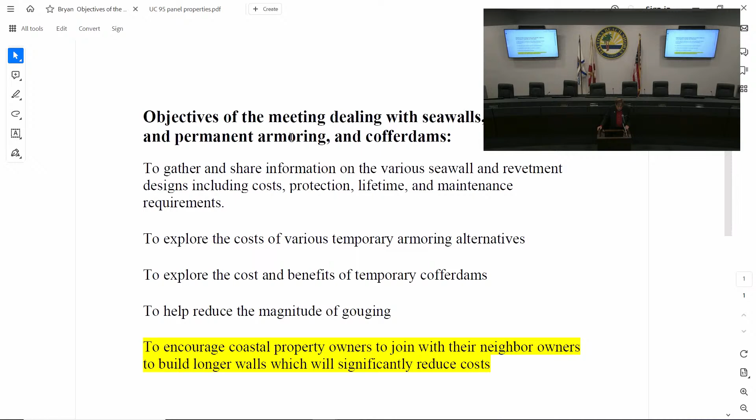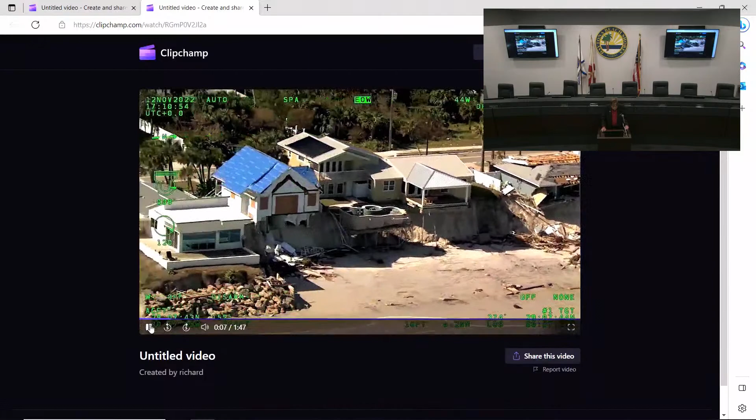So the next slide - it's not actually a slide, it's a video. This is kind of to remind you of the devastation, but there are some significant points along here that I want to point out. This is the destruction down in Wilbur. Let me see if I can get this. As you know, did you want a maximum? Yeah, okay, thank you. There you go. I'm going to back this up a little bit.

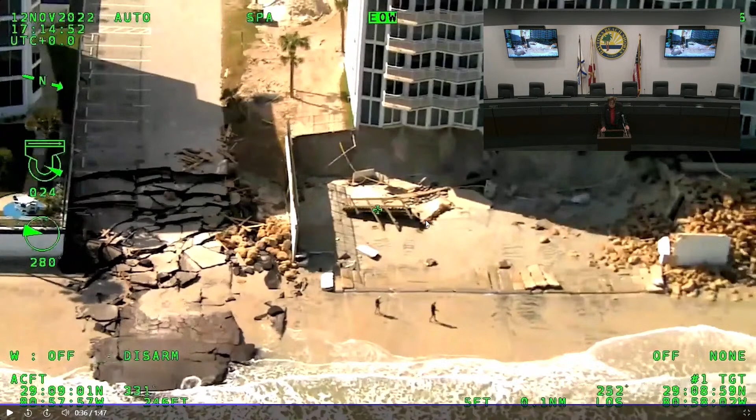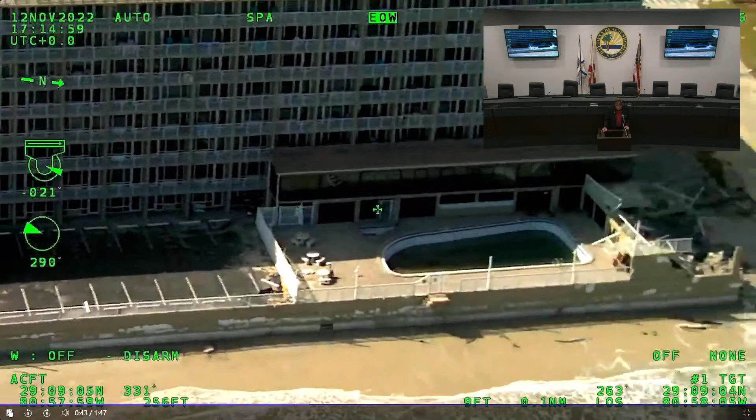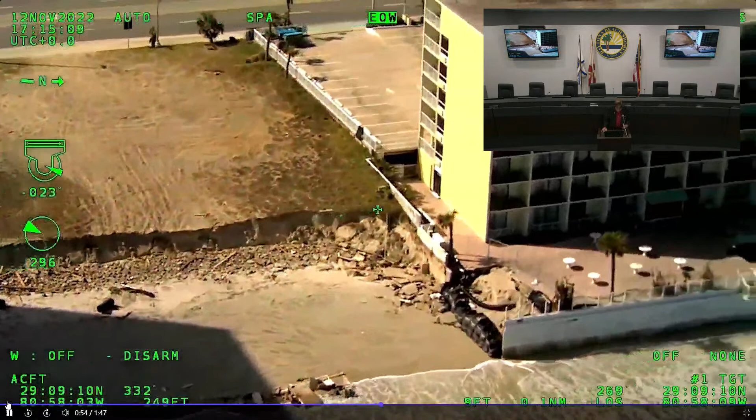This is next to Towers 10, a vacant lot that got a lot of erosion. I'm going to stop here at Peck Park.

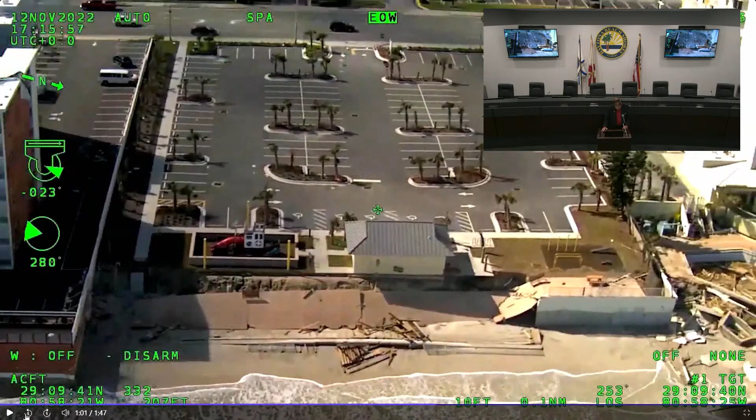One of the things this shows is this seawall over in the north corner - about 51 or 52 feet of fairly new seawall, installed in the last 2 years. The design is reinforced concrete. It actually suffered some erosion on the north side and south side of the soil behind it, but it stood, whereas the bottom of the south, maybe 150 feet or so, was demolished. I guess what that says is not that a concrete seawall is the best, but this particular design protected against Nicole, even with partial erosion on the north and south ends. That wall happens to be leaning a little bit to the west now, but it's one example of a seawall that basically held.

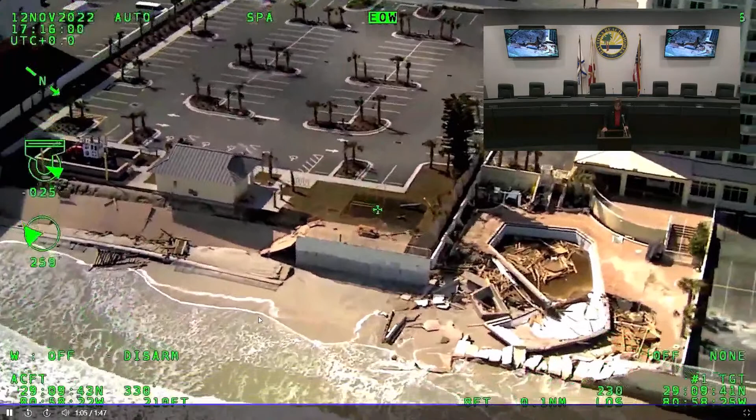Hey Richard, just to clarify, the north portion was a separate, newer one. Yeah, the other part was an older one. Yeah, right, it was built in the last 2 years, and the other was older. I think it was designed on top of an old seawall, which is basically a no-no.

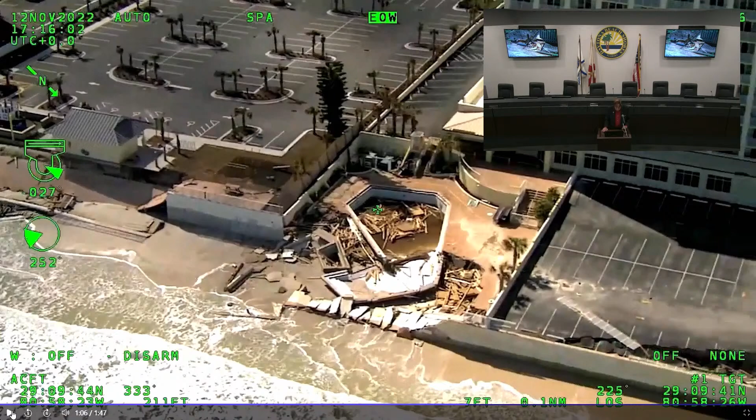There are properties adjacent to Peck Park - see this one, and the one just to the north of that property. I think this is St. Croix on the north. Those three properties south of St. Croix could benefit if they got together and built a common seawall, if we knew who the owner of the lot was. St. Croix probably doesn't need to be part of the common seawall, I think. But anyway, that's just an example of a row of properties that could benefit.

I should mention that erosion has gone back further since Nicole, quite a bit. That's another reason why there needs to be temporary armament to protect these properties, because probably none of those three will actually have a permanent seawall by the end of the hurricane season. That's just my guess.

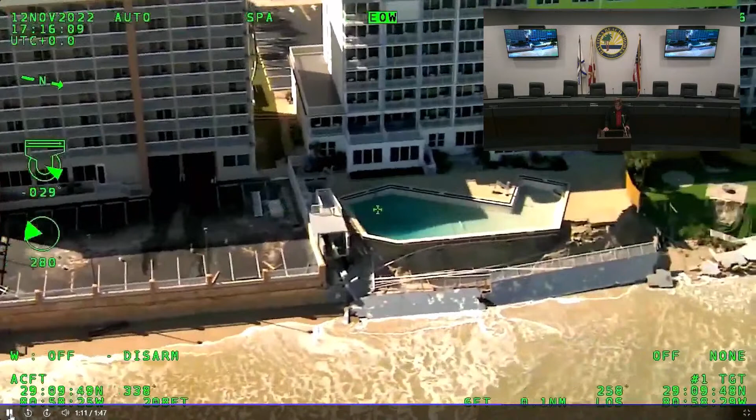These are approximately 30 homes south of Frank Rendon Park and north of St. Kitts. You can see the significant erosion. I think on average these properties lost about 60 feet total - approximately 30 feet from Ian, and another 30 feet from Nicole.

You can also see that the erosion goes back to the property, that's called an escarpment - that's erosion that goes all the way back to where you see a wall of sand. You can see from this picture that the escarpments are not in a row, they're staggered. I'll tell you a little bit why that's an issue.

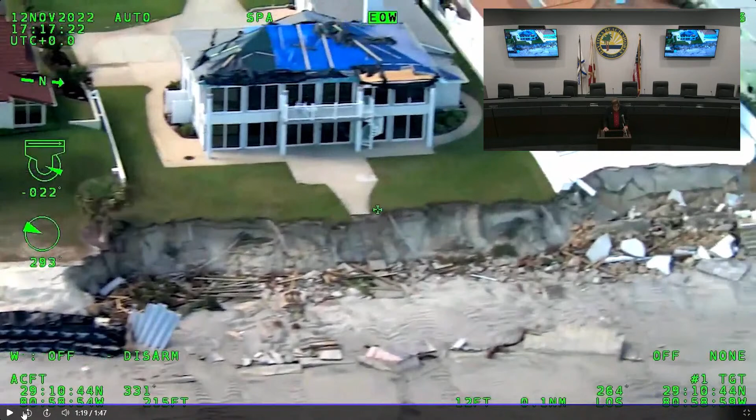If we go forward just a little bit here - that property, which happens to be 2727 South Atlantic, put these trap bags out after Ian and before Nicole. I think the configuration is one trap bag on top of two, I'm not 100% sure, but I think it is. So whatever the configuration is, it protected against significant erosion through Nicole.

Right now it's the only property that I'm aware of. If any of you know any other properties that have either a two trap bag configuration like the county's putting out, or a one-over-two, I'd be interested in knowing that, because that may be important empirical data that says what temporary armament might get people through the next hurricane season.

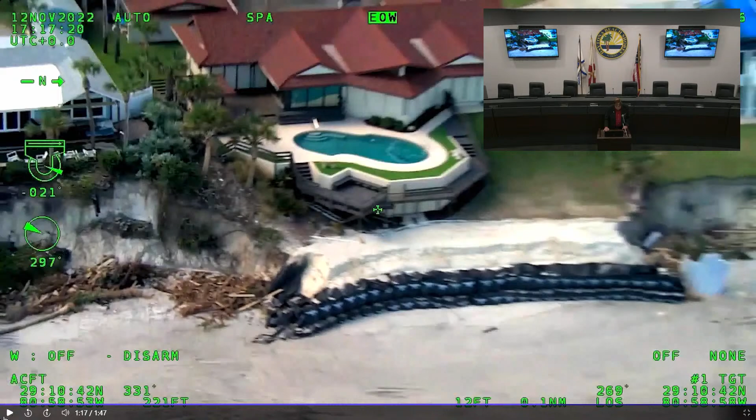This is just some more of the single-family homes showing you how the escarpments are uneven and the kind of damage. The one at the very end next to Frank Rendon got a lot of damage.

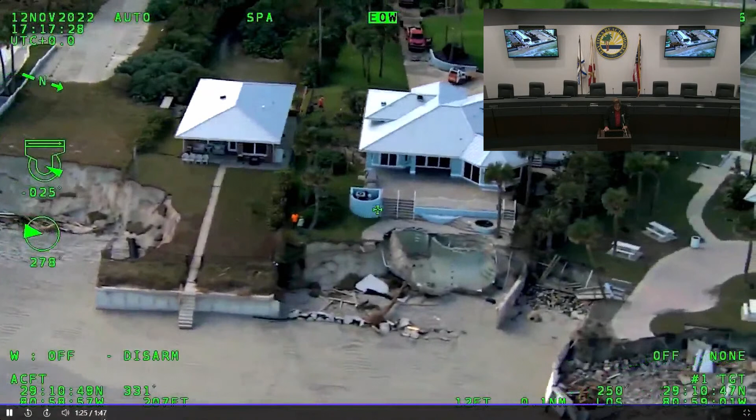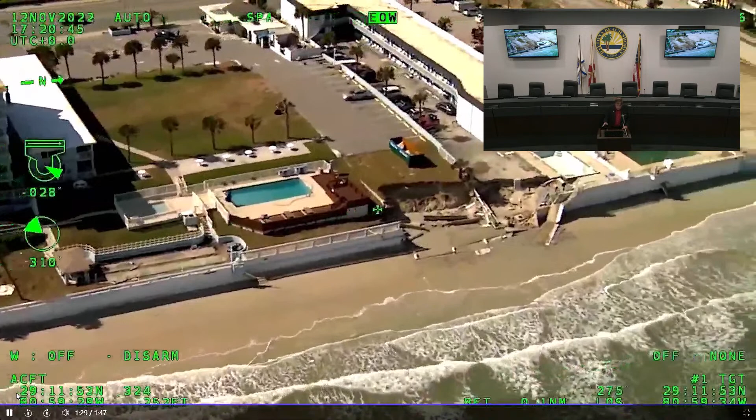This row of properties, what you're looking at in the middle is what used to be Treasure Island, plus the property to the south of it. That's about 700 feet of property.

So the people streaming can't hear you. Oh. Can you hear me now? Okay, this is...

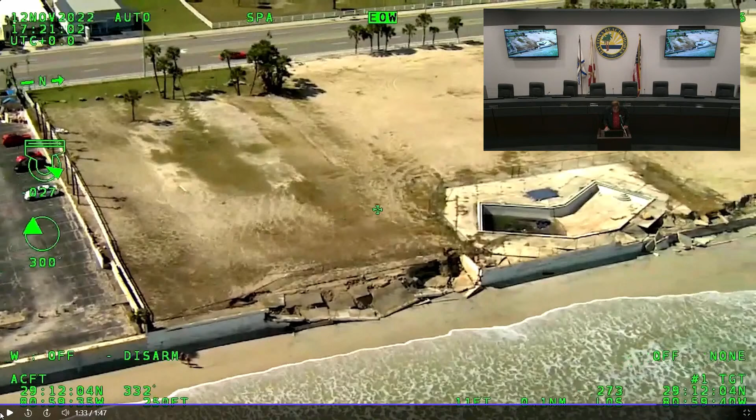To the south of that there's property, and to the north of that there's property. We can go a little further north - this is one prime example. If these neighbors got together and cooperated, there's probably 2,500 or 3,000 feet there. If they built a common seawall, they could save a considerable amount of money, and probably aesthetically it would be more pleasing to people rather than having a hodgepodge of designs. That's up to the property owners to judge - I don't have much of an opinion one way or another on the aesthetics. They can actually get a better design, and put more time and effort into the engineering by splitting the engineering costs and so on. So that's an example of a fairly long stretch in the shores that could benefit.

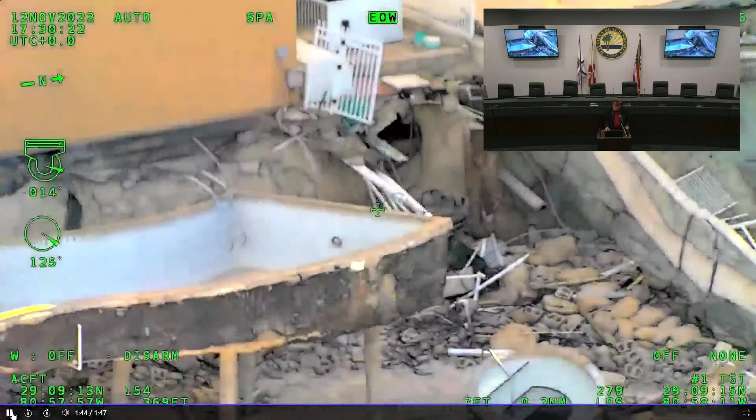That's some more. That's the end of the video.

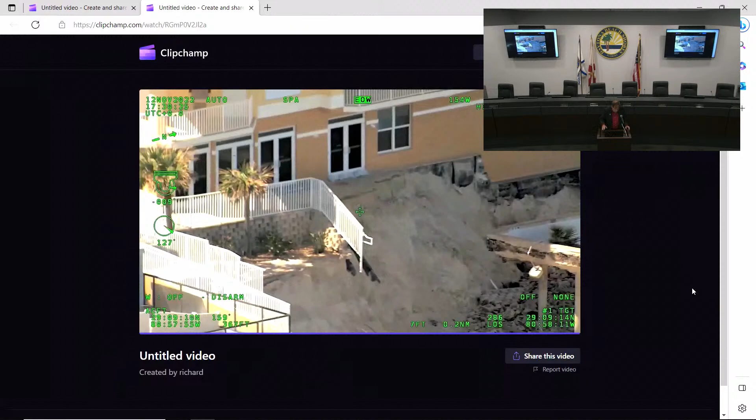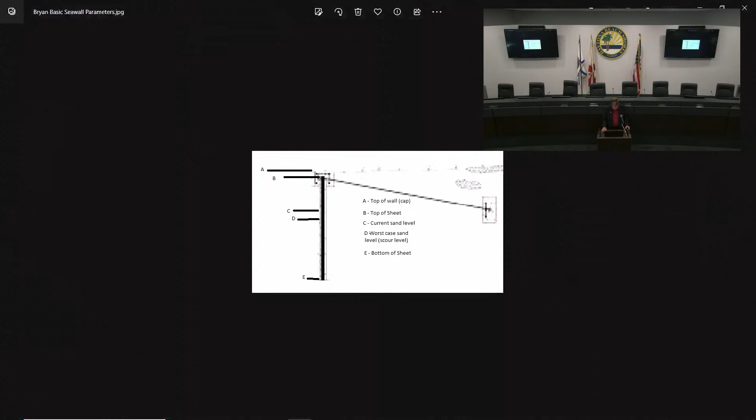Okay, I'm going to move on into what you might call Seawall 101. The engineers can take a short nap if you want, this is pretty basic.

This is like a cross-section of a seawall. There are 5 kind of important numbers. Obviously the top of the seawall, which is here, is the top of the cap, A, that elevation, and there's a coordinate system called NAVD that all these numbers would be expressed in.

Some people think of above ground, but the sand is not static, it moves up and down in elevation, so it's not a very good reference point. NAVD is a fixed point, it doesn't matter where the sand is, the zero NAVD is the same. Physically, it's approximately the mean high water mark, just to give you some feel for what it is.

Inside that cap, there's typically the top of a sheet. That elevation is B there. Numbers between A and B are typically like a foot, maybe 2 feet.

C is just where the sand happens to be whenever the analysis is done. It's kind of unimportant, because what drives the design is D, which is basically the lowest level of the sand next to the seawall that you can expect over time. It's like a worst case level. Unfortunately, it's not something you can just plug into a formula and have every engineer get the same answer.

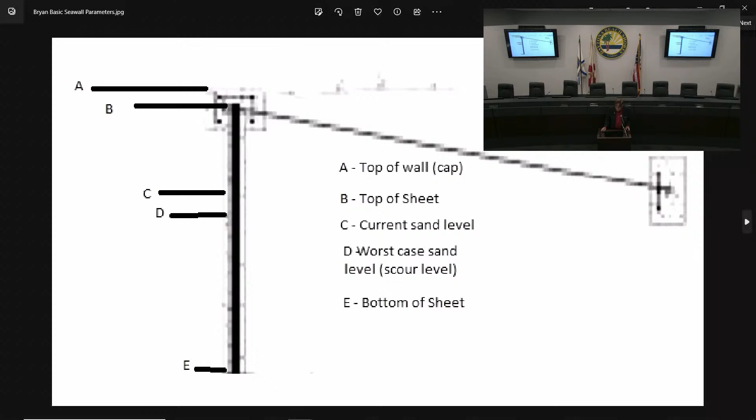And E is just the bottom of the sheet in NAVD coordinates. We sent a questionnaire to all the presenters and potential presenters asking for a bunch of information, including those numbers, and I think at least some of the presenters will say what those numbers are for their design. I'll be covering one of the properties and I'll spell out those numbers for that property, which happens to be Twin Towers.

This is a revetment, and I think I'm going to save what I have to say about revetments until after the seawall presentations.

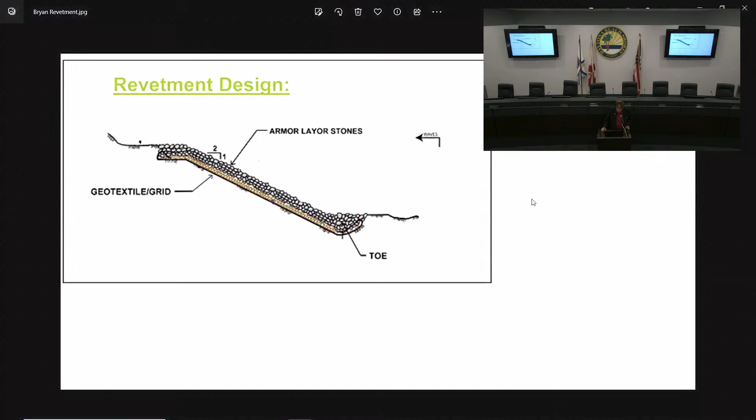So I'll turn it over to Jeff Anton. Jeff is with Tarragon Engineering. He'll tell you about the properties he's working on. Towers Grand is one of them.

Thank you, Commissioner, for hosting this meeting. I think it's very important for the professional and construction community to get together and discuss these issues, because they do have ramifications 50, 60, 70 years from now, after we're all gone, for the people who are behind us.

My name's Jeff Anton. I own Tarragon Engineering. We're a specialty marine engineering firm who do marinas, docks, seawalls. Predecessor companies dating back to 2007, back to 2016, we've been exclusively doing primarily seawalls, but marinas as well, and a large number of residential docks. I hold a master's degree in coastal engineering from University of Florida, 1992, go Gators, and a bachelor's of civil engineering from Ohio State University.

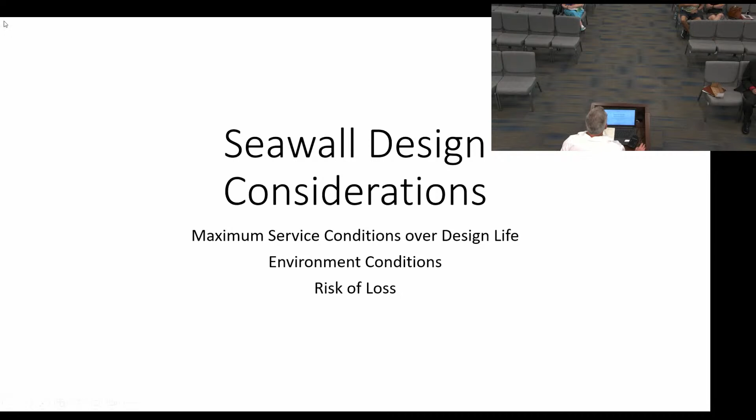Rather than talk about specific projects, since we're all doing specific projects with our own technical aspects, I'm going to talk about, from my perspective as a trained coastal engineer, what I consider maximum service conditions over the design life of the wall. A 100-year storm event at minimum, and what conditions the wall is likely to see, the environmental conditions in which it serves, and the risk of loss of what it's protecting. Obviously, a large residential backyard is not going to bear the same as some of my clients here, who have pools and other very expensive infrastructure that was damaged.

Commissioner Bryan mentioned the maximum exposure and scour toe. There's a publication by FDEP I'll refer you to. These are R monuments, R92 to R122, covering Daytona Beach Shores. In the last column, you'll see the 100-year storm design grade elevation, based on University of Florida modeling done back in the 80s. That's an NGVD number, 3.6, so today it's 2.4 NAVD, which is the 100-year floor as predicted by FDEP. The number adjacent is the storm elevation, the still water elevation, also an NGVD number. We convert that to NAVD, and you're at 13.5. So that's roughly the design considerations we were using.

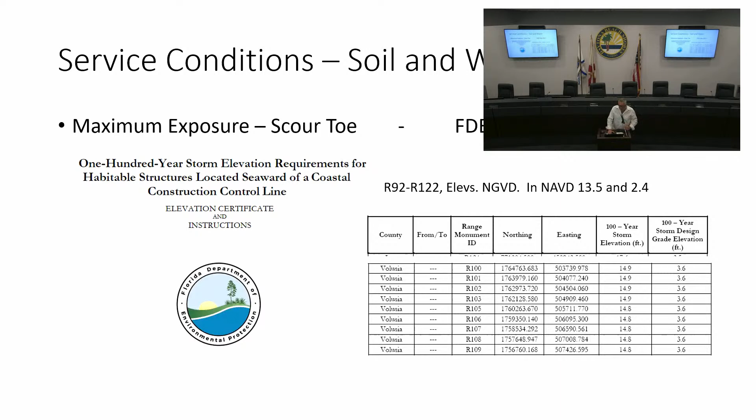The fatigue cycle, the cycle loading, a 5-hour tide cycle, 8-second period, maybe 8 to 10-second period on the waves, that's 2,300 cycles per tide. That's going to be 15,000 to 20,000 potential loads in the course of a storm like Nicole. At those loads, fatigue is an extraordinarily important consideration. I don't see a lot of that being considered.

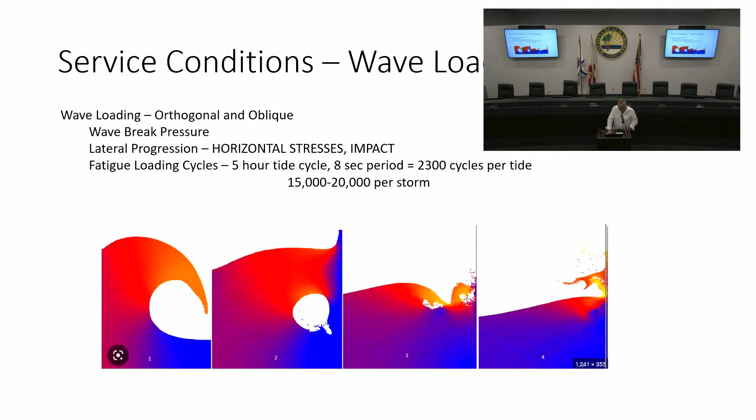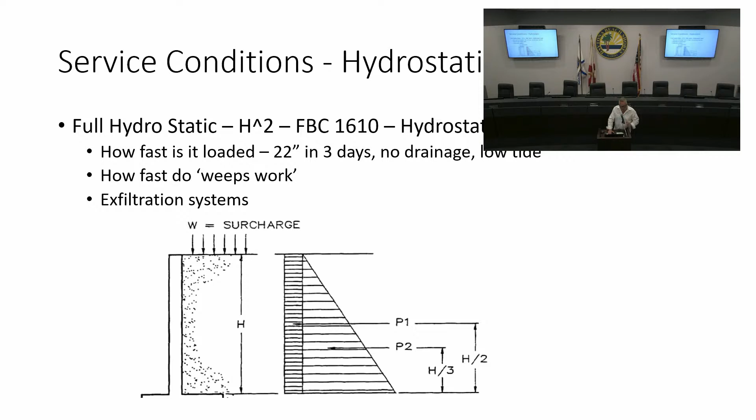Hydrostatic loading - I've also seen a lot of walls I've reverse engineered, and seeing hydrostatic loading 5 to 6 feet below ground surface. We had 22 inches of rain in 3 days. On top of that, we had waves hitting the wall, saturating the ground. A number of these communities have exfiltration trenches in their backyard. That's not a wall, it's a dam, and you should design and treat it as such. It is very conservative, but again, we are on the oceanfront protecting very valuable infrastructure. So we can say, oh yeah, there's a drainage system, oh yeah, there's weeps, but how fast are those weeps going to work at low tide if it's still raining and keeping you full? Again, consider the most extreme design load that we're going to see.

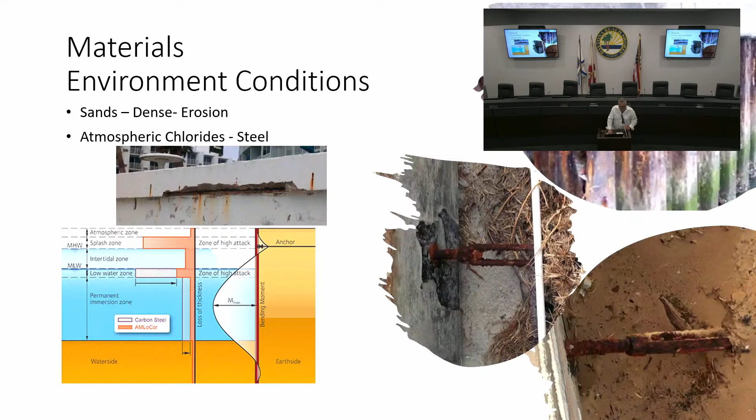So we look at materials. First of all, we're working with very dense sands here, 50, 60 blow count sands - really, I've never seen it in Florida, but we're seeing it, and that's very good for toeing in a wall, so long as it doesn't get eroded. We've got an enormous amount of atmospheric chlorides, the harshest place on Earth. There's a number of publications that show you the various considerations if you're putting in steel, also steel tiebacks - if you're within 4 feet of the ground surface, you're exposed to high chlorides. And then, of course, reinforced concrete: one crack, you're exposing the internal steel.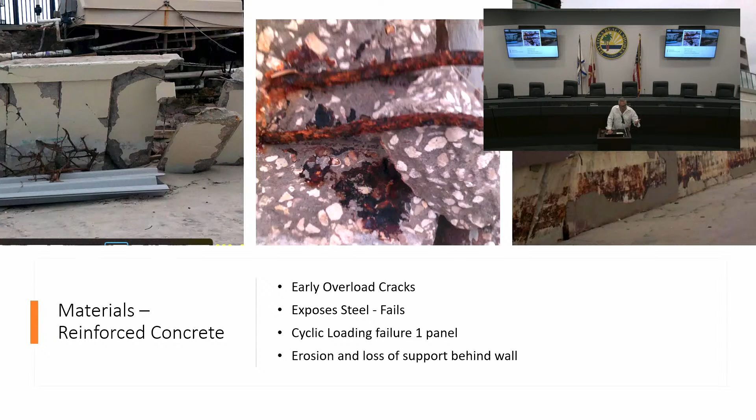That's where I saw a lot of previous damage manifest during the storm. By the way, I led a group of University of Florida students immediately after the hurricane, and it was Seawalls 101 out there. If you want to see how to design something, see how it breaks, and we saw every mode of failure. By the way, reinforce the corners between your main wall and your return walls - so much broke there. And then, of course, one panel breaches forward, and the rest of them breach backwards after you get scour behind it.

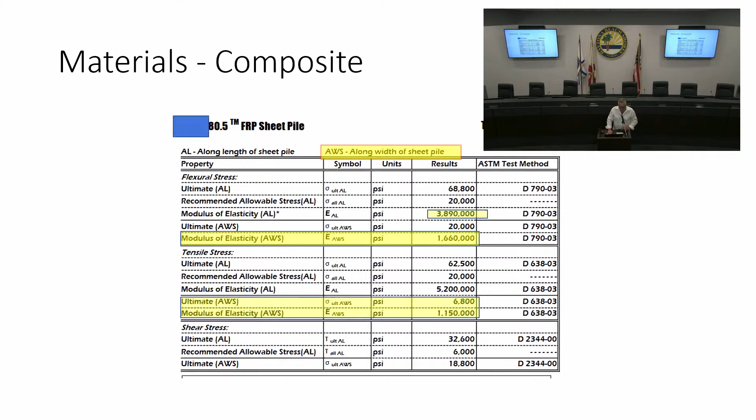Composite materials have become very popular. I'm not particularly a fan of it - it's an anisotropic material. If you look at the modulus of elasticity and the ultimate tensile stress, you'll see along the panel length you're at 20,000 tensile strength, across the panel you're at 6,800. Couple that with your cyclic loading, especially if you have horizontal loading as the wave progresses breaking down the wall, and consider what might happen before you just jump into using anisotropic materials. I looked at some of the composite performance at New Smyrna Park - there's some breaking of the sea locks.

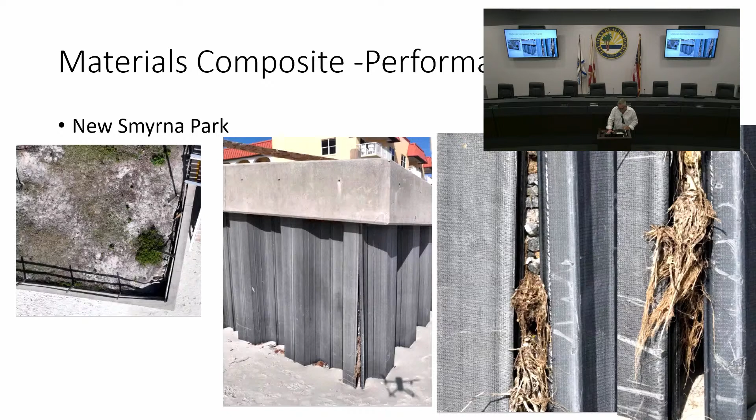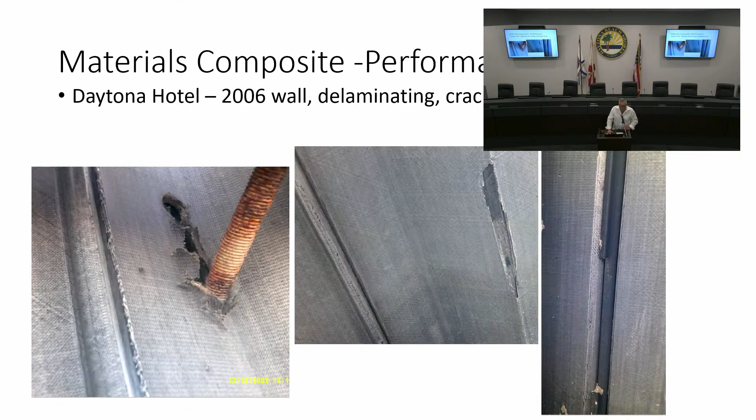The sea locks and the bowing on it were also stressed, and then there was an incomplete wall in Wilbur. Full disclosure, this was one of my projects, a residential project. Yes, I did, and I still will continue to spec composite for lower impact walls, shorter walls that aren't going to be taking 8-foot, 10-foot waves, but maybe 6-foot.

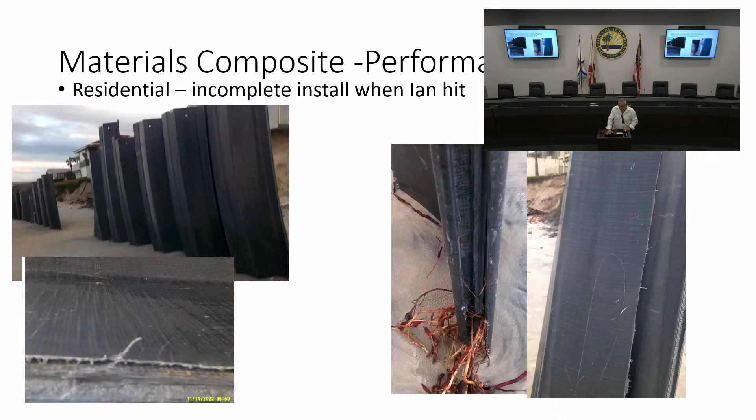This wall was not completed, but it did show a number of where the stress points and where it will fail: delamination on the bottom left corner and delamination on the right side. I still believe in the material, but its applications and how far you push it, really consider that for your customers and clients.

Hybrid concrete and steel and vinyl - it's a wall design that we have. It's using steel as a core, as the main structural core. The concrete and vinyl kind of protect that steel and give an enduring facade. The wall shown on the upper right is one that we finished construction in 2021 in Satellite Beach. It weathered the storm quite nicely.

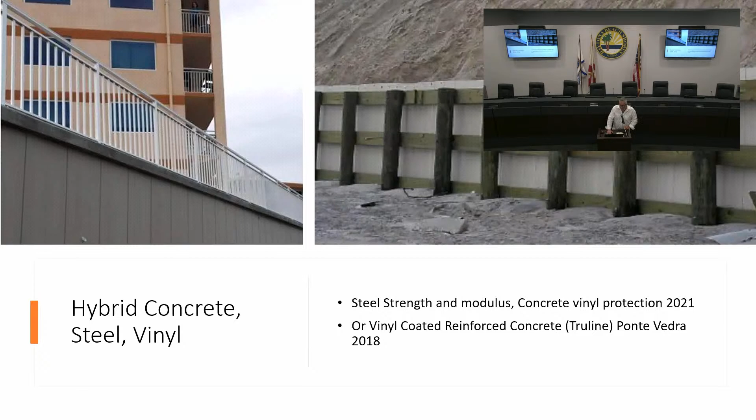The other one is a Truline wall that's up in Ponte Vedra Beach. Also survived very, very well. Truline being, I think most people are familiar with what that is. That has limitations in terms of height.

The industry really needs standards. In the state of Florida, as many seawalls as we have, not to have something.

Is that the alarm for me to get? You got the hook?

Again, I don't know, I mean, maybe it starts here. Maybe it starts with ASCE. Maybe it starts somewhere else. Maybe it starts with commissioners putting pressure on the legislature for Florida Building Code to be revised. I don't know, but we need something. We really need something in the state of Florida that kind of guides all engineers.

Professional engineers, it requires us to be professionals. We really have to stick to our integrity, stay within our lanes of competence, call out on each other, lean on each other for expertise. Again, we're protecting some very, very valuable property here.

Building departments, a lot of them just kind of wash their hands like, we don't have any code. There's a lot of municipalities that have local codes and local ordinances. They should be considered. And then design minimums - full hydrostatic loading, wave impact design, and corrosion resistance - are really key in our approach.

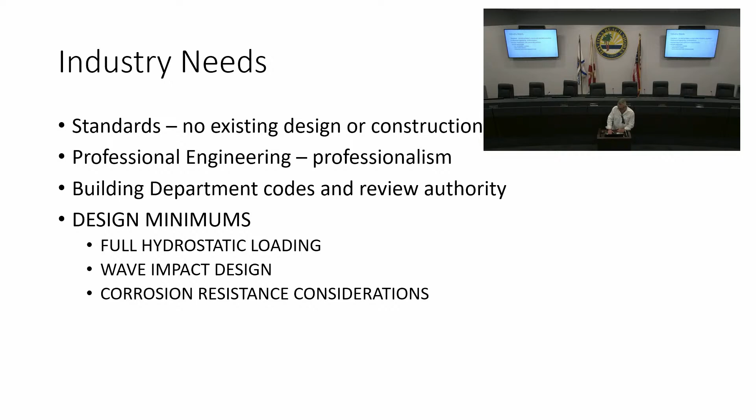Thank you very much for your time. And I guess I get a few questions or?

On returns, would the composite material stand up to whatever? I think the composite is a really, really great return material. The caution is that you'd be able to properly junction that to the main wall. It will offer the protection because generally they're not going to take direct wave impact loading, but at the time that you end up building it, converting from one material to another probably won't have substantial enough cost savings. We have looked at differing materials on the returns.

So it would be the corners that you would have to reinforce, were they connected, is that right? Yeah, I mean, you could build your main wall and do a few feet return with your main wall and then do the junction and probably be okay. But with the cost of composite compared to the other materials that are out there, if you bury steel and it's coated, that's gonna last forever. It's really when it's exposed to atmospheric chlorides.

What's your name and address? What's your name and address? Oh, it's Marcia Holman at the St. Croix, 145 South Atlantic.

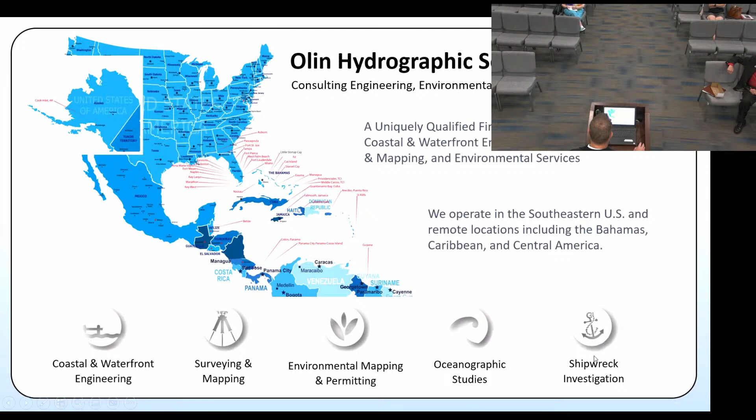So as he said, I'm an engineer. We work all throughout Florida, and in the Caribbean. We do everything from coastal engineering to waterfront work. We design big marinas, we do surveying and mapping in-house, boundary surveys. We do all the permitting for walls, coastal construction, DEP, wind wave model studies, everything like that. And I'm a treasure hunter - shipwreck investigations - so I have all the toys and tools and boats to go map the seafloor, naturally turned that into some fun stuff too. So here are a couple jobs that we've done.

I don't know if you guys are familiar, but Fisher Island is one of the highest per capita income communities down in Miami. It's a private island, lots of billionaires live there. We design their overwater ferry terminals and a lot of their seawalls. I've done hundreds of underwater inspections on every type of seawall, from steel to composite to aluminum to concrete panel, and seen walls that lasted 40 years, walls that failed after 10 years, walls that failed after 3 years. So I get to see a lot in my work, which helps from a construction design point of view, seeing what works and what doesn't over the years.

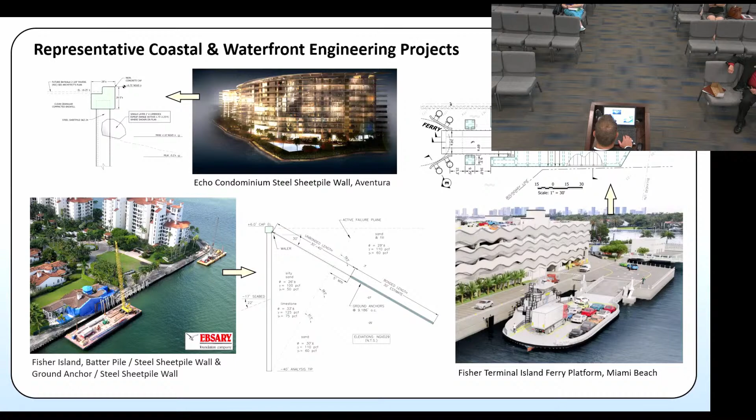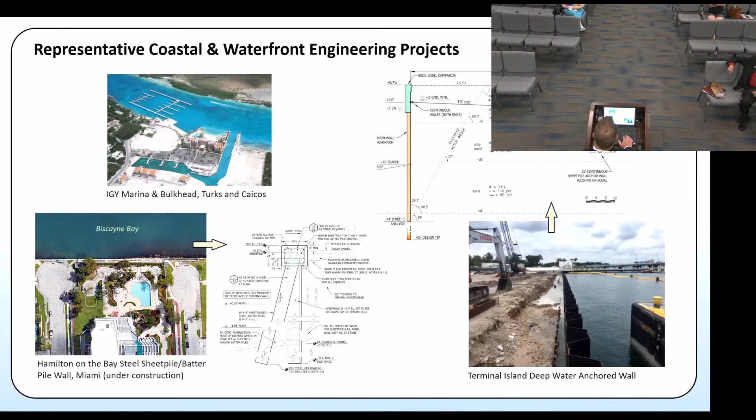As I said, we do every type of design. When I go into homeowners association meetings, the one thing I tell them is, if you don't need a new wall, I'm not going to design a new wall. We'll repair the wall you have, we'll look at the cost estimates, and I typically don't give a one size fits all design.

For the Seabreeze, the Fantasy 2, and the Dolphin properties we're working on in Daytona, I designed the wall 3 different ways. First, a least impactive, quickest install cantilever option: drive the sheets in, do the numerical calculations, get the wall in as fast as humanly possible. Then, to save money, a much thinner, shorter sheet tied back with conventional deadman anchors. We also looked at helical anchors, just to get some different pricing from the contractors to maybe save them some money.

Some of the walls I did at Fisher Island, we had 6 different design options that we bid, and we chose the one ultimately that saved them a bunch of millions of dollars. They were pretty happy with that design approach. One thing that's changed, it's been a bit surprising, is the costing operations in doing this.

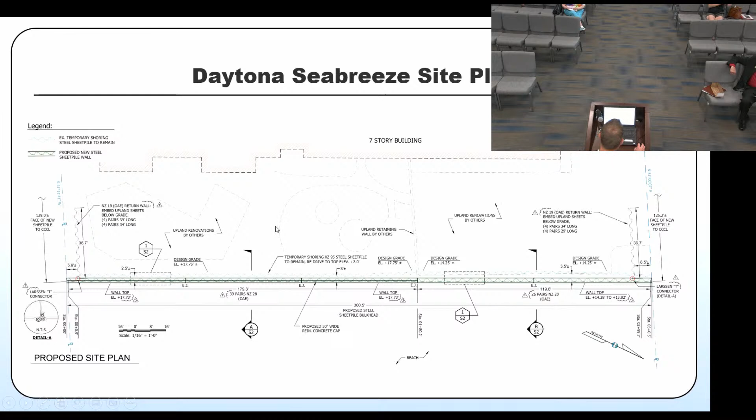I won't go into all the calcs and the structural calcs unless it's needed. I think we answered the questionnaire, but I'm happy to answer questions when it comes to the specific details.

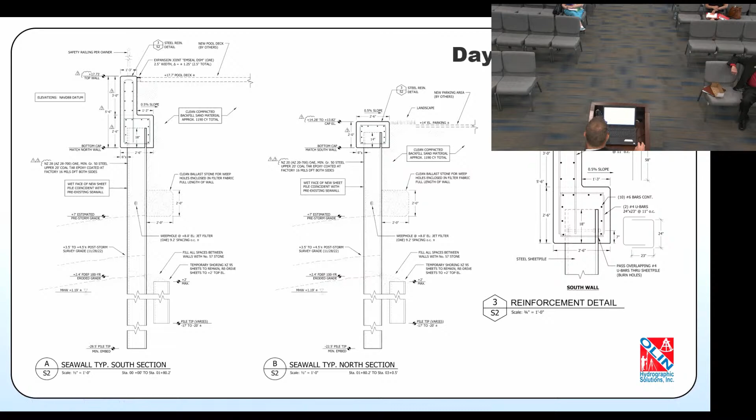We were able to get permits under the emergency order to put the wall back to the same elevation. Does that mean if the old seawall was down at +10 and they built a CBS wall on top of that, another 5 feet, what's the elevation of the existing wall? Well, technically it's all seawall, so we went and got the entire elevation. We built it according to what the maximum CBS wall was, so our new sheet pile wall handles all that without the need for a weaker landscape wall to get the elevation up, and they allowed that under the order permit.

This is the Dolphin Beach Club. It was unique among the 3 in that it already had a section of steel sheet pile with a return wall on the north side of the wall, and that section of wall held up very well in the storm.

I was actually called in prior to the second storm, for the first storm, when I did seawall inspections on them, and we saw some discrepancies and gaps and things that had opened up. They asked me, hey, are our walls going to be okay for the rest of the season? And I said in my reports, take a look north, take a look south at the properties that have the same kind of wall or similar type made way back when, and see that most of them failed. I think if these storms went any longer, you probably would have lost your wall. Thank goodness I said that, because fast forward to this second hurricane, they all lost their walls. So they were like, well, you're our engineer, let's go to town.

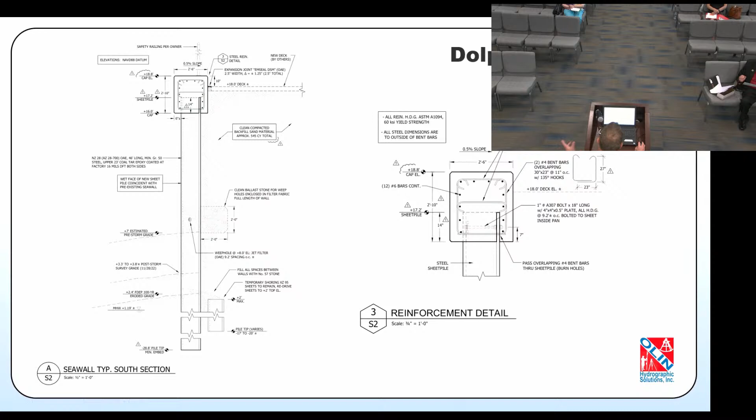These designs, as I said, we did them all different ways - with thinner sheets, tieback, and without cantilevers. Ultimately the client wanted to get these things done and put in. They didn't want to impact the pool designs or any of the landscape architects, or want coordination surveying the tiebacks and missing them with the pile supports for the new pools and things like that. So they said, get this thing in.

During this process I talked to a couple contractors and asked, what kind of savings would we have gotten had we gone the other way, back when it looked like we had a little bit of time? Typically over the years, last 10 years or so, you design a sheet pile - if the cantilever has to be bigger, it has to be beefier, and when you come in with a tieback wall, it's a thinner sheet. You spend a lot of money on steel. The cost of steel right now is almost doubled in the last couple of years, so that upfront cost of buying all that extra steel really hurts.

But guess what, the cost of labor has also gone way up. With all the contractors and everybody busy, it ultimately came down to - could we put in a tieback system with fewer sheets, but now we have this new labor cost of digging the tiebacks in, ordering them, pouring, forming, doing all that, or putting in directional ground anchors? Ultimately several contractors said at this point it's a wash - same price to drive a thicker steel sheet pile cantilever by itself, get in, get out, put a cap on it, be done, as it was to save money on the sheets but spend extra money on labor.

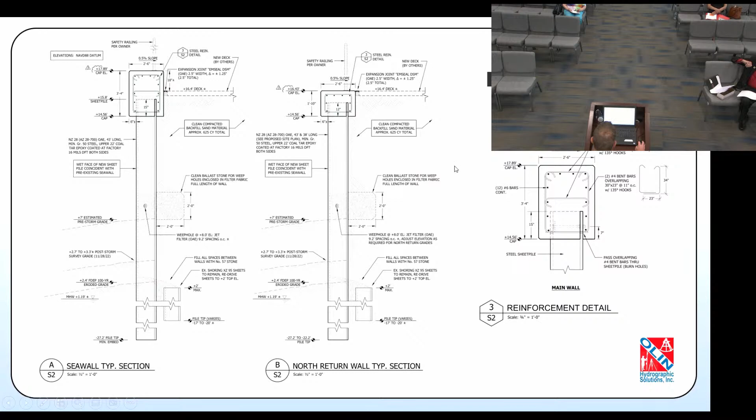So anyway, we came in, put in all the temporary walls, got that in very quickly. One interesting thing - on a section near the neighbor's wall that looked like it was going to collapse, they had a small gap where they didn't put in the temporary sheets. They laid some sheets down at the toe, then had the filter fabric up, and the waves were breaking on that.

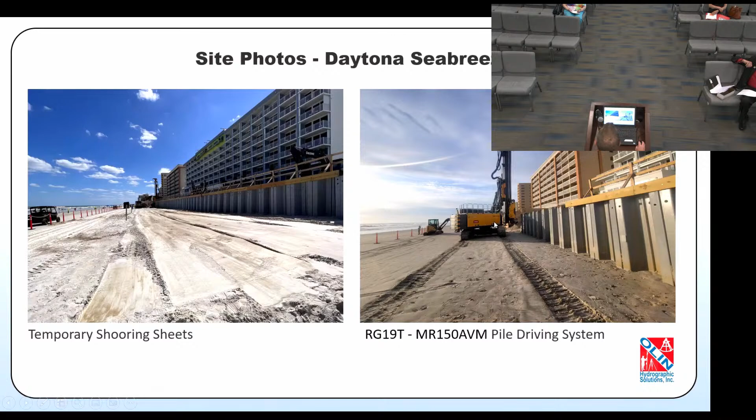Not a long-term storm fix, but good for a big blow or a 7-8 foot wave day. They brought in this piece of equipment, the pile driving system - even with the tides and everything, they're probably getting 70 feet per day. I think in a 10-hour day they could get 120 feet if they didn't have to deal with the tides and beach access. That piece of equipment was immediately shipped in from Germany, got here in about 4 days - from the time they ordered it to shipped here, I think it was within a week. This thing really just goes, picks them up, drives them, goes fast.

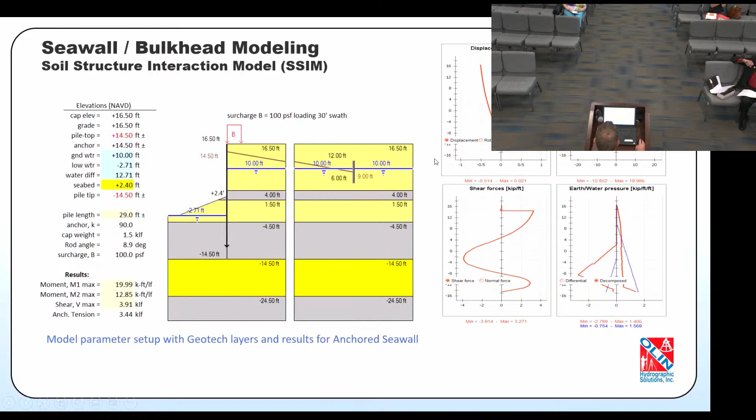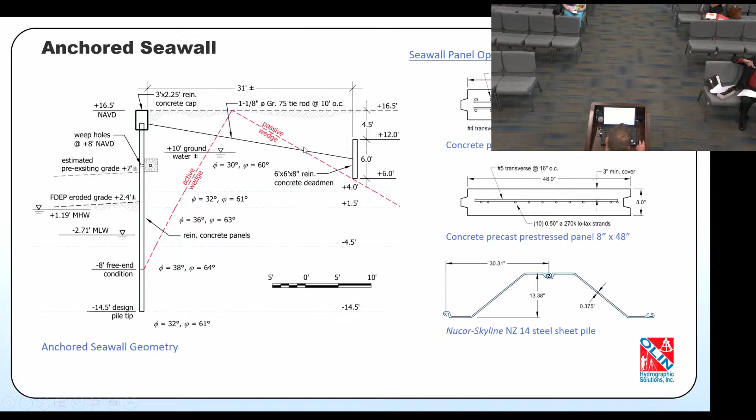I had him do some cantilever options just to present here for you guys while we were waiting for the meeting to start. You have your different elevations, your active wedge, your passive wedge, and if you have a tieback system, you have to get back far enough from the wall to get past that failure zone. That's pretty much the design.

I think right now, if I'm a homeowner sitting there without a wall protecting my property heading into hurricane season, based on what I've talked about with Brock Mountain and a couple other contractors, what they can do is come in with a temporary fix, right now, tomorrow, and start driving sheets at your property.

So what we would do is specify a sheet pile that works in the cantilever, probably an AZ-22, which means it's not really heavy duty, not lightweight, but you don't have to go as high as we did at most of our properties, about a plus 12. You put about a 30-foot sheet in the ground, and they could drive these sheets immediately, for about $2,000 on the low end if they're just putting a sheet in to get you through. Then you get your permits done and have somebody else come in, or they could come in later and build your final cap with engineered drawings. The temporary at that point would basically become the permanent, but done very fast.

I think they can get materials very quickly, they told me. Eric is somewhere here - there he is. That's something we talked with Quincy about just this afternoon, to see how quick it could be done. Every job is a little different, but we could have the design done where you're putting in a temporary wall that ultimately becomes your final wall, and we could do that very quickly for you guys. I guess, questions?

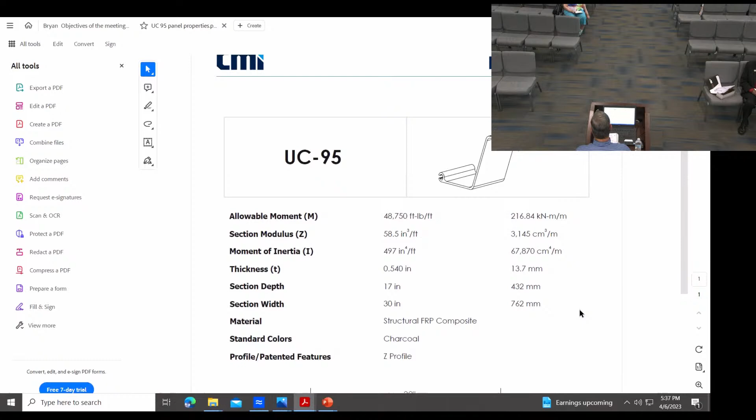Any other questions? Yeah, what's your fallback plan if you don't have a seawall? Well, yeah, if we don't have the seawall in place...

I think the fallback plan right now is with the county offering the 2 trap bags. I would highly recommend putting one on top of the 2. So the one on top of the 2 would be at our expense, and my understanding is the county will provide the other 2 as the base. I would highly recommend 2 and then 1.

And then we met with the trap bag person, and one thing he specified is when people backfill their trap bags, they typically fill to the top of the top trap bag and slope it up. His recommendation is only going halfway up to the top of your top trap bag to put less hydrostatic pressure on the trap bag if the soils become saturated. So I would recommend that also to our HOA, and I've had discussions with the president, and he's on board with those discussions.

Could we do it in time before hurricane season? I don't know, but that's our fallback plan.

Right now our contractor is telling us he's got us in writing saying we're going to start before the 24th of April. And they're doing the Hawaiian project, and it's only 100 or 200 yards from our property, so in theory he could start while finishing up the Hawaiian.

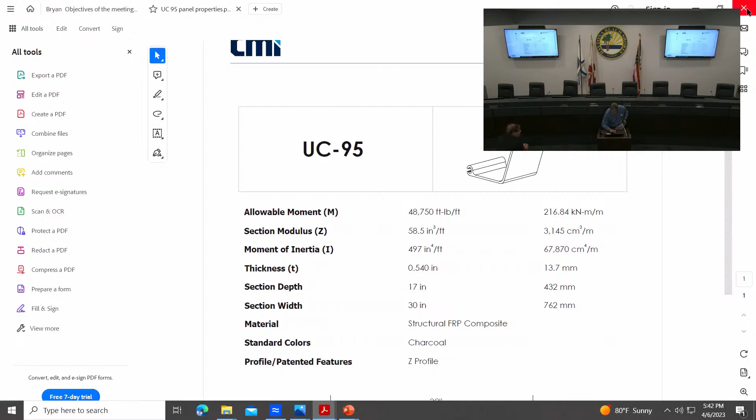I didn't close it out. Oh, it's okay. There were two other people that actually answered the questionnaire, so I'm going to skip over them pretty quickly.

One was Twin Towers. They've actually started construction now, and they're using the same UC 95 that John just talked about - it's a composite design. The engineer is Chuck Adams, CRA, and they expect to be finished before the end of May. I'm not going to say a lot about it, because if they wanted to make the presentation, they could have been here to make it. I don't think there's a lot that's unique about it other than the fact that they're one of the first people to actually start construction.

They're the ones I mentioned that are next to you guys, Twin Towers. You guys are looking at steel - you guys being Grand Coquina. I'm sorry, I know you're Marbella, but Grand Coquina is right next to you, and they're going to have a steel return wall and a composite return wall, 50 feet, or is it more than 50 feet? So that's 100 feet that you wouldn't need if you'd been able to put it together on a common design.

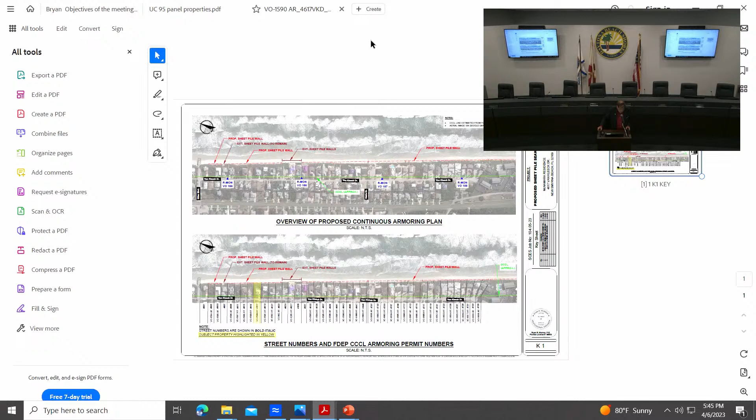I think their savings is probably on the order of 25%, and it comes primarily from eliminating either the length of the return walls and/or the number of the return walls. Right now their design is a composite sheet, but they're not planning to actually start construction until at least the middle of the summer.

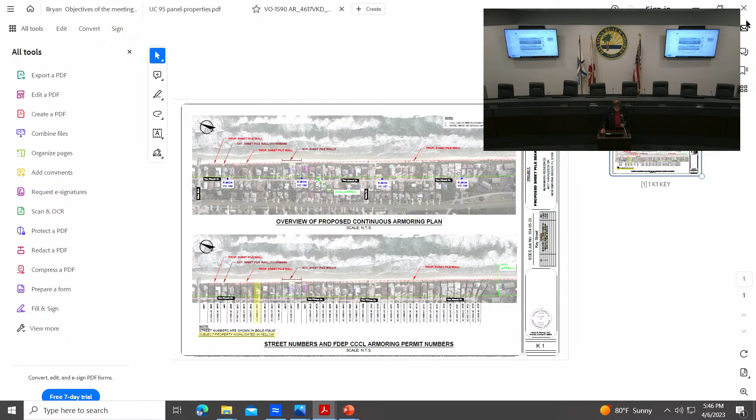So I'm not sure exactly what they're doing as far as temporary armoring. But the main reason why I wanted to bring them up is just to show the advantage of getting together with your neighbors and building a common wall. So that kind of ends the seawall presentation. If there are any residual questions, I'll take them on the seawalls.

I'm just going to briefly mention the revetments, because I don't think anybody here actually does a revetment. But, well, without even putting up - oh, you have, sorry. Hi, Ken Meister, 4227 South Atlantic. Are you in Wilbur by the Sea? Yes. I know the chairman copied you on the email to me.

One of the biggest expenses is the backfill requirement and where the sand's coming from. Yeah, and I've asked Jeff Brower to see if they can push the DEP to get us the same sand they're using for the emergency restoration, the 37 plus 5 million, which I understand is closer, more local sand. Any thoughts on that? Because it would save all of us a tremendous amount of money. One of the big concerns we have with the county right now, or at least in discussions, is that they have a 40-foot right-of-way between my property and my neighbor.

We want to build a common wall, but we have to go across the county's right-of-way. They're saying we'll let you do it, but you have to pay for everything, which is the seawall. We're willing to do that because we can eliminate the returns and close the gap, but there's probably going to be $100,000 worth of sand, with the prices people are telling me it costs per truckload, which is $1,000 to $1,200 a truckload, getting the sand from Palatka or wherever they're getting it from.